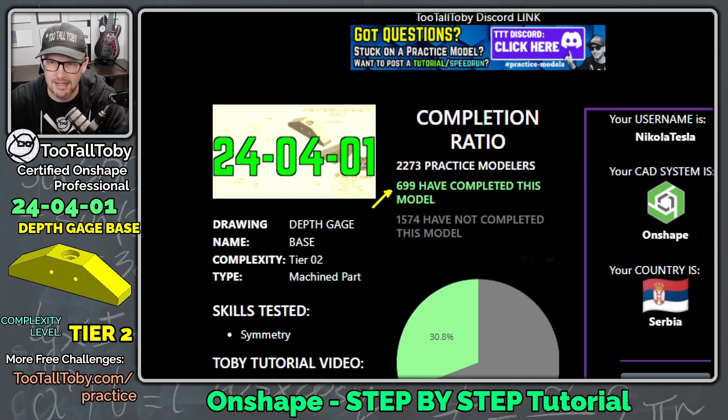Well, one of these free challenges is this one here, 24-04-01. It's a Tier 2 challenge. So let's click here to practice, and once we click here to practice, we can see that there are 699 people who have completed this model. So let's see if we can become number 700. So we're going to go down here to the very bottom. We're going to say click here to begin, and we're going to say reveal drawing and go.

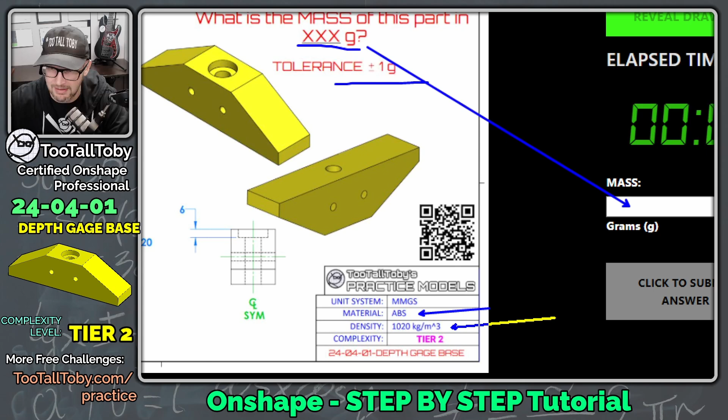What is the mass of this part in XXX grams? We're going to put that answer in down here. The tolerance is plus or minus 1 gram. And it looks like this part is using ABS with a material density of 1020 kilograms per cubic meter. So even though the clock is running, I think it's always a good idea to get started by coming up with a basic game plan and then going and starting to create your actual 3D geometry.

So for this model here, and really for any model, the first thing you want to ask yourself is, where should the origin be located in the 3D model? And so one tool that we can use to help us decide on that is, are there any directions of symmetry? Are there any lines of symmetry? So here we see it says CLSYM. That means that we've got symmetry in this model.

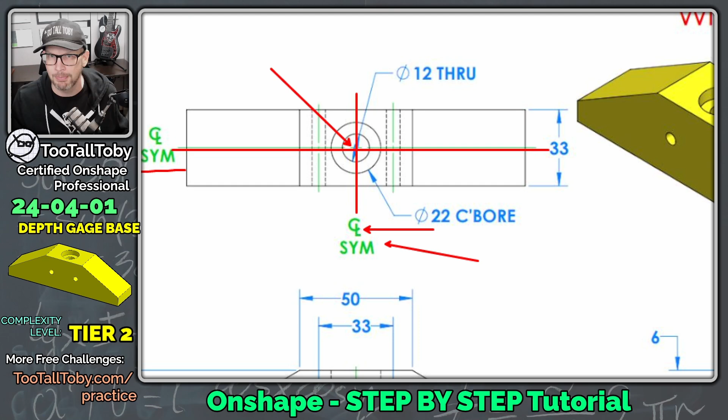So the origin is going to be located right here, right at the intersection of those two lines of symmetry. And that's going to make it easy for us to do mirroring commands or maybe add this part into an assembly and locate it using those planes. Now, as far as the origin location here in the front view, if you don't know anything else about the model, you can usually just put it right here at the base of the model, right where the model would rest upon a table or maybe on another part in the assembly. So the origin is going to be located right here, right at the center of the model.

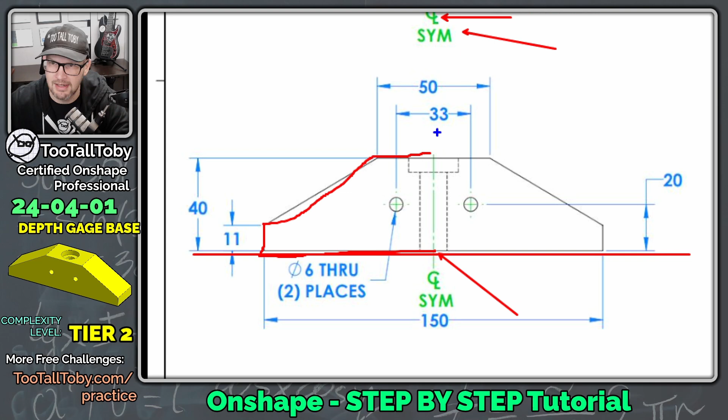Now, the next thing that comes into the game plan is, what should my first sketch look like? And I think this sketch is going to look something like this. It's going to be half of this polygon, and then maybe we'll create a center line here. We'll use the letter Q to create that center line in Onshape, and then mirror that geometry across for that first sketch.

Now, after we take that first sketch and we extrude it out to 33, for our next feature, we're going to create these holes, and we're going to do something kind of fun here. We're going to use a rectangle to define the location of those holes, and then we'll use the Onshape hole tool. And then for our final feature, we'll once again use the Onshape hole tool, but this time to locate this hole, we will use a mate connector. So even though this is a Tier 2 level complexity model, there's still a lot of really cool tips and tricks and shortcuts for Onshape users.

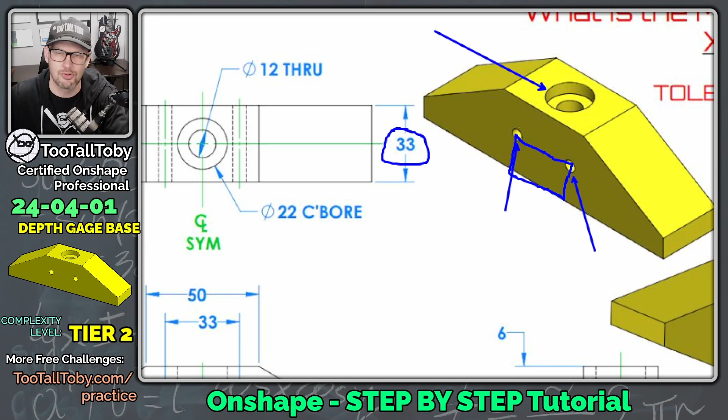Let's get into today's challenge. So I'm going to take this drawing and move it over here onto my second screen. Let me close the current drawing here. We'll close this current document.

And let's bring up our keyboard cam and the clock. We can see we're 2 minutes in, so we got to make up some time here. So let's do this. Create document, and I'm going to call this 24-04-01-depth gage base. And I'm going to create this as a public document.

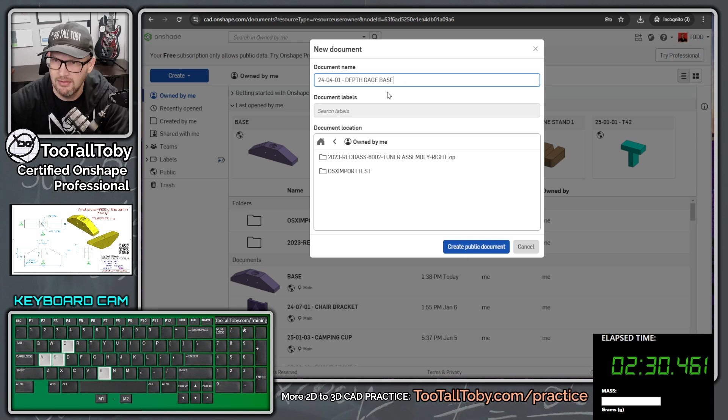So if you are ever interested in looking up this part, my actual part file in Onshape, you can just go here and search the public repository in Onshape. Anybody with a free Onshape account can do that. So I'm going to say create public document, and boom, we are in 3D CAD.

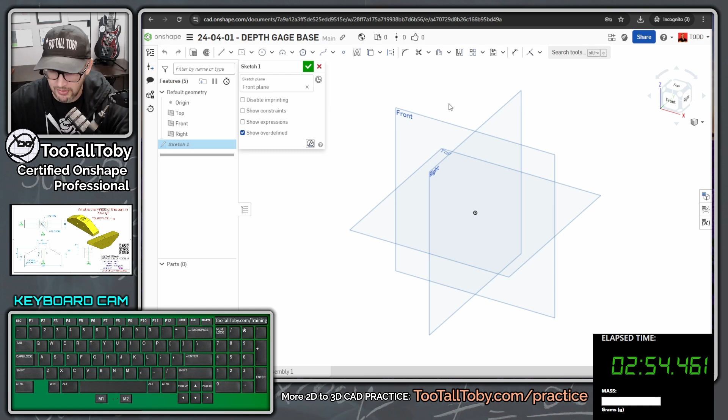Let's go to the front plane, S key, begin a new sketch. So I press the letter S on my keyboard to bring up that menu, and then N to get normal to that front plane. Now I'm going to press S again, and I'm going to launch the line command, and I'm going to bring a line over here about 75 millimeters. I'll just use that kind of dynamic feedback to get me close. So 1/2 of 150. I'll come up here about 11 millimeters.

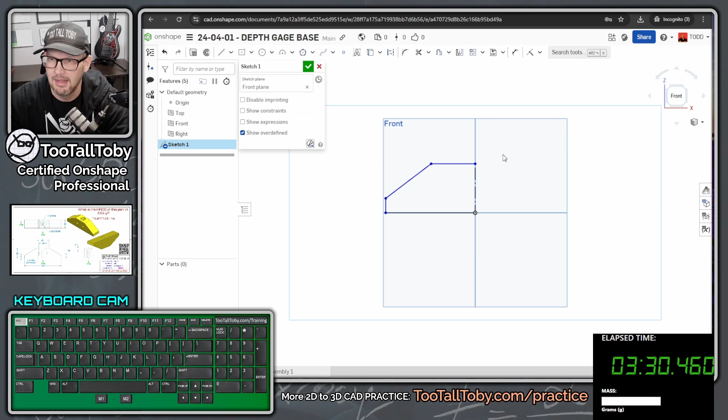I'll go up here at an angle and then come across to finish off that sketch. And then as I'm creating this final line here, I'm going to press Q on my keyboard. And you can see what Q does is it changes that line from being a solid line to being a construction line. Now, the reason that's helpful is because now I can press Escape and then I can put a window around everything, and then I can choose this icon here, mirror, and that just mirrors that whole sketch right over.

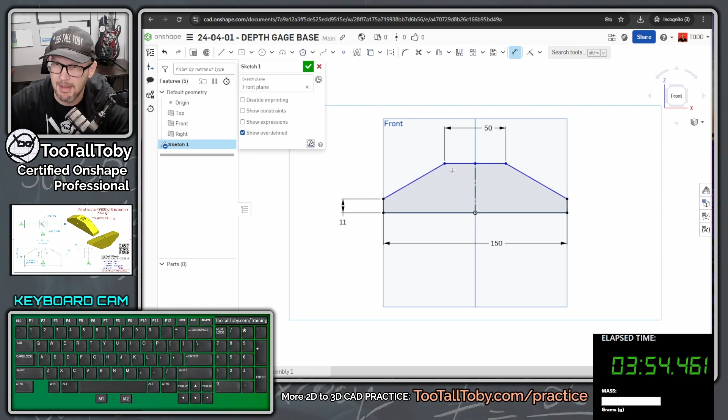So now I can just press S and go into the dimension command and create a dimension here for the max width, 150, enter, single click on this line, 11, enter, and then click on this point and click on this point, and we're gonna make that 50 millimeters. Now the final dimension is going to be our height dimension here. So from the top to the base there, and that distance is going to be 40 millimeters. And there we go. We've got a nice fully constrained sketch. That's what we always want in Onshape before we turn it into a feature.

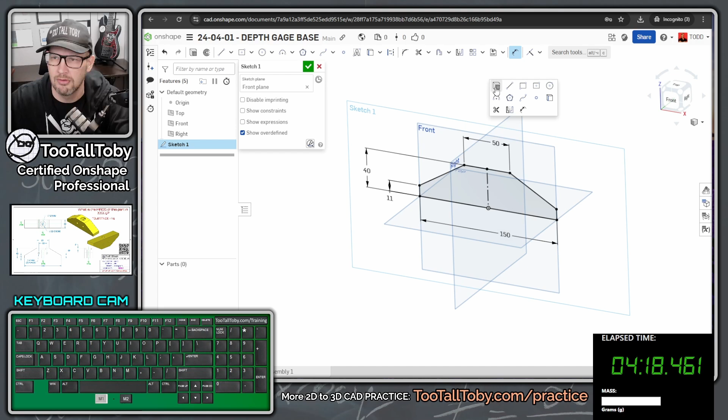So now that we've got that first sketch in place, we can press the S key. I've customized my S key here in Onshape so that I've got the extrude command right there waiting for me. So I'm going to choose extrude, and then I'm going to press the tab key on my keyboard. I think this is a really nice shortcut. You can press the tab key a couple of times and get down to the depth, 33,

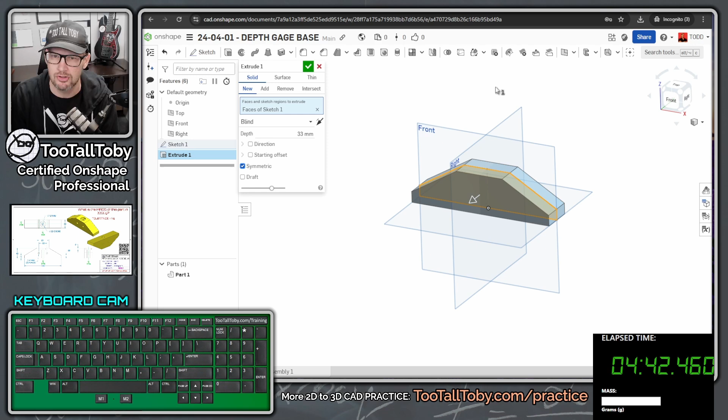and you press enter one time. And then you can press the tab key a couple more times to get down to symmetric. And then you can press the space bar on your keyboard, and that activates that symmetry option. So you see that extrude changed from going in one direction to being a mid-plane extrusion. And now we can just press enter on our keyboard, and boom, we are done with that first feature.

And so now for our second feature, what we're going to be doing is adding in these holes here that are punched through the model. Now you might say, why not just include those in the first sketch? And you could certainly do that, but a lot of times it's beneficial to kind of break up your features, especially if you need to go back later and make changes to your model. So don't ever feel like you have to put everything in one sketch.

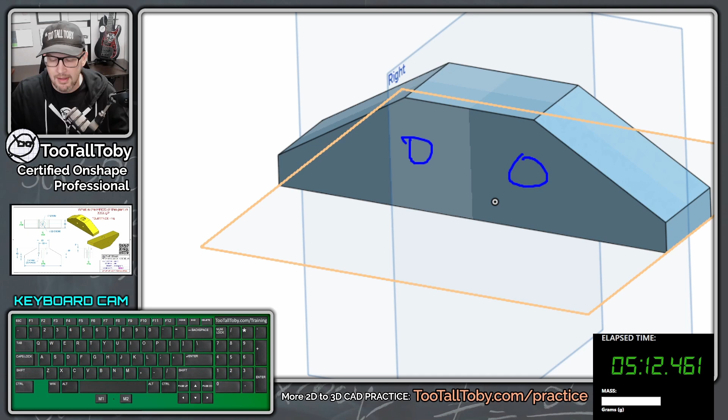A lot of times it's better to keep your sketches simple and just to have more features in the tree, especially if you get in the habit of renaming. So I could call this kind of like the main shape, and that way I can tell right away that it doesn't have the holes in it just by looking at the tree. So now I could pick on this face here, S key, begin a sketch, N key, that gets me normal. And now this is where we're going to do something kind of tricky.

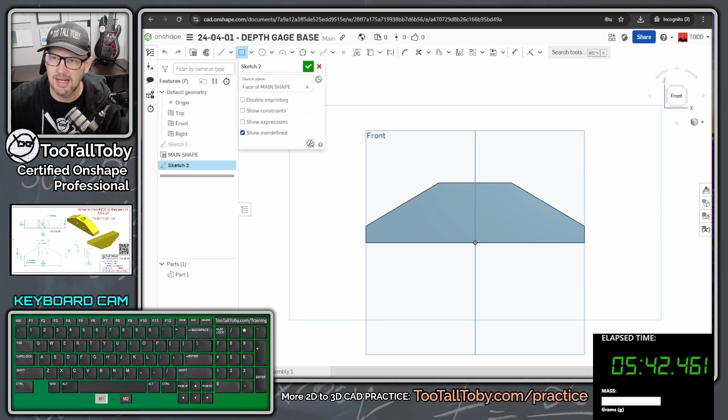I'm going to press the S key again, and I'm going to create a center rectangle. Now again, I've customized my S key, so if you don't have center rectangle, you might consider adding that to your sketch shortcut toolbar. But I'm going to choose the center rectangle command. I'm going to move my mouse here so I'm directly above the origin.

I'm going to single click. I'm going to move my mouse kind of up and to the left, and then I'm going to single click again. And now I'm going to let go of my mouse, and I'm going to type in the dimensions to locate those two holes. So the width between those, the center to center for those holes is 33, enter. And then the height from the base is 20, enter.

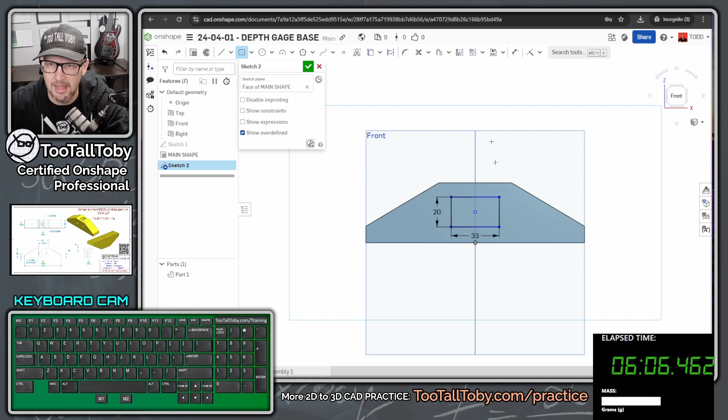And then what I can do is I can press escape to get out of the rectangle command, and I can just take this lower line, single left click, and this lower line down here, single left click, and press I to establish a coincident relationship between the bottom of that rectangle and the base. And that can be a huge time saver when you're locating things like holes. Because now what I can do is I can exit this sketch. So I hit the check mark here to exit that sketch, and then jump into the hole command in Onshape.

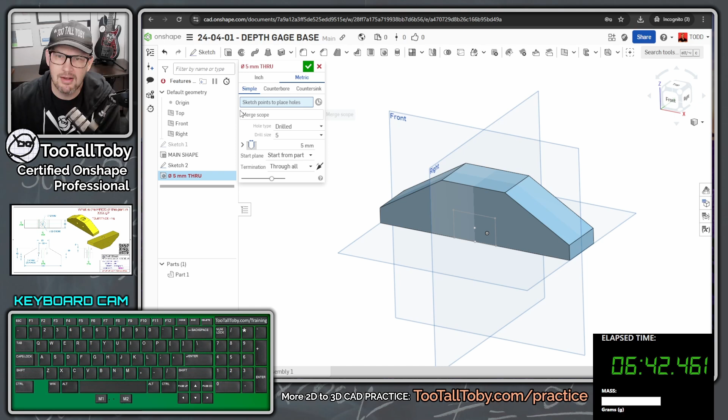And you can see you can choose either inch or metric for the standard for the hole. And then you can choose simple, counterbore, or countersink. Well, I'm going to choose simple. And then here you see it says sketch points to place the holes. Well, I can just pick on this point here and this point here from my rectangle, and we've got those holes perfectly located. And so now I can go down to the diameter of that simple hole. That diameter is going to be 6 millimeters, enter, that updates the preview.

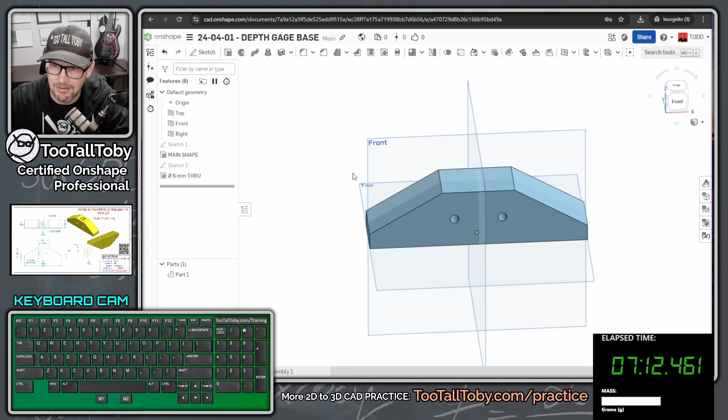And then I can go down here for the termination and make sure that that's set to through all, so those holes go right through the entire model. So now that I've got that in place, I can hit the green check mark, and there we go. We got those holes running through. Onshape even took it upon itself to automatically hide that sketch. So you can see here that that sketch is hidden.

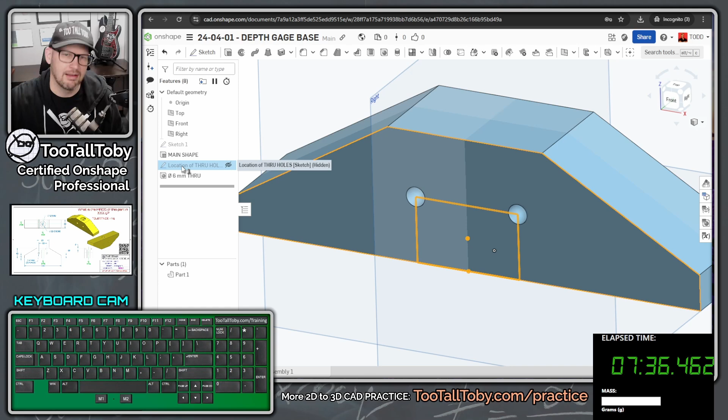So maybe I would click on that sketch and press Shift N, and then I would rename that to something like location of 6 millimeter holes. Or sometimes I don't name them based on the size. Sometimes I name them based on the location in case the size changes. So location of through holes, something like that. So now I know that that sketch is kind of like the dedicated sketch for those through holes. Now you see here I've got several things selected. So you want to remember you can press the space bar on your keyboard, and then that unselects everything.

And so now for our final feature, we're going to use what's called a mate connector.

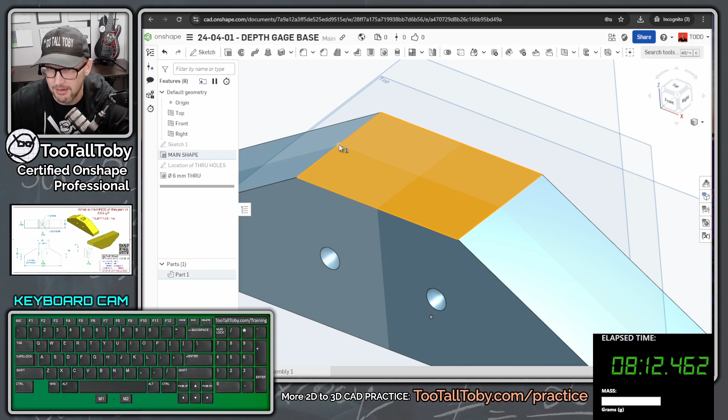But the mate connector video will really help explain what mate connectors do. But basically, if you pick a planar face, a rectangular face like this, you can use a mate connector to automatically select the midpoint of this edge, or pick this corner, or pick the midpoint of this edge, or pick the middle point of the entire face. And that's what I'm going to end up doing with the mate connector here.

So I'm going to choose the command hole. I'm going to choose the standard of metric, the hole type of counterbore. And then here, instead of choosing a sketch point, I'm going to choose this button, select mate connectors. And then what you'll see is as I take my mouse out over these different faces, I can use the mate connector to select the very center of any one of these faces. Well, I'm going to be selecting the very center of this face here.

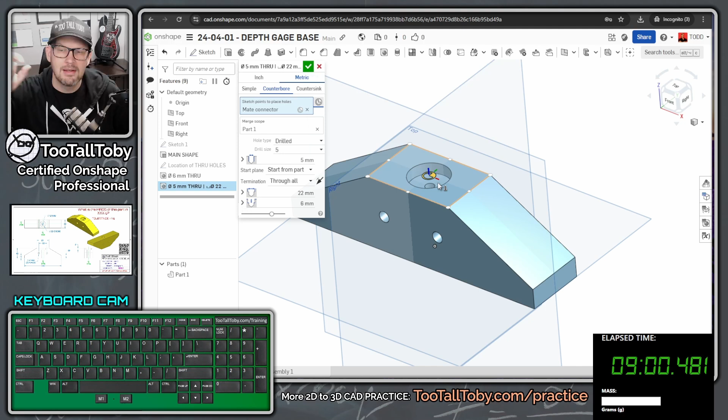So I can pick the midpoint of the edge or the end point of the edge or the midpoint of this edge or the center of the entire face. And so that's what I'm going to do here. I'm going to pick here. That selects the location for the hole to be based on the location of the mate connector, which is the center of that planar face that I selected.

And then I'm going to go down here to my counterbore definition. So the through hole for the counterbore is going to be this first dimension here. I'm going to make that 12, and then I'll use the tab key again, and I'll just tab, get down here to the diameter of the counterbore.

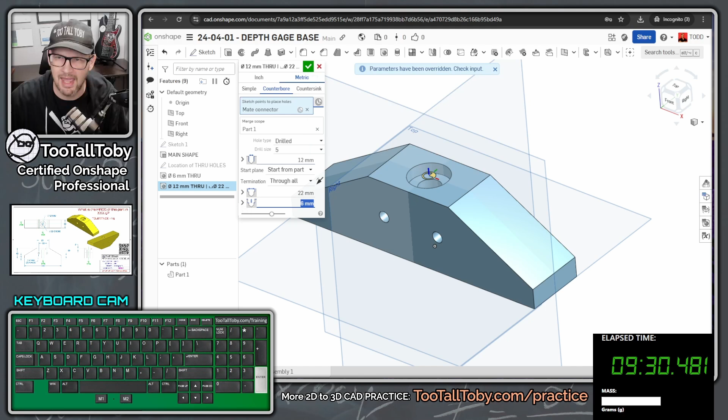That diameter is going to be 22, and then I'm going to press tab again, and this is the depth of the counter bore, and that depth is going to be 6. And then I can press enter, and there we go. This model's looking pretty good. I can press the P key on my keyboard that hides the planes. I can roll this view around so that I can see the entire model just to kind of confirm that it looks like the drawing.

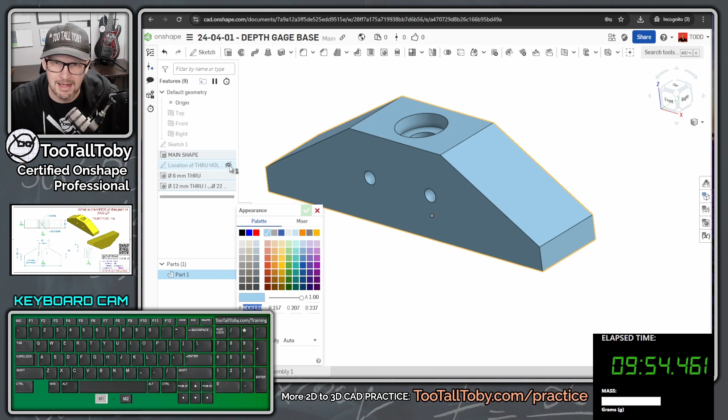Now, if you're working with customers, a lot of times the customers want to see the parts in the same colors that they originally gave you in the spec. So you could right mouse button down here on the name of the part and say edit appearance. And then you can choose to make this yellow color, or you could even go into the mixer. If you happen to know the RGB formula, you could do like a 255 tab 0. That's the formula for yellow.

If you happen to know the hex key, the FFFF00, then you can just type that in as well. Or you could just choose it here from the mixer and kind of try to get it pretty close to what the customer gave you. Either way, there you go. You can change the appearance. You probably wouldn't do that in a speed run, but if we're just doing this for the customer, it's good to know how to do that.

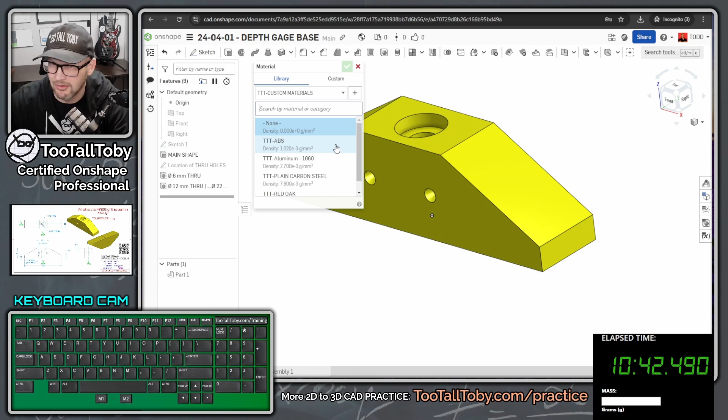And then finally, to calculate the mass correctly, we have to have the correct material properties. So we right mouse button on the name of the part again. We go here to assign material, and then we can move this box up top here, and we can say we want to change this from the Onshape material library to the tootalltoby custom materials library. Then we can fly out this menu here, and we can choose ABS. And we hit the green check mark.

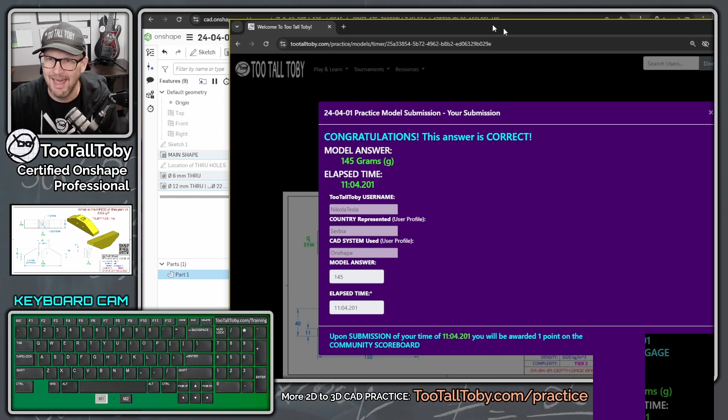And now down here, kind of behind the clock, we've got this icon, which is for mass properties. So we click on that icon in the lower right. We come up here, we click on this body, and we're coming up with a mass of 145 grams. So I'm going to come down here into this box for mass, 145 and enter. And oh yeah, there we go. We see it says, congratulations, this answer is correct. We got it correct, 145 grams. So I'm going to say submit.

And once I submit my answer, I unlock some additional analytics down at the lower part of the practice models page. So here we see that now 700, actually somebody else did it while we were doing it. So now 701 people have completed this model. And then if we scroll down here, we can see that the average time for this model is 4 minutes and 48 seconds. Wow, that's pretty fast. My time for the model was 11 minutes and 4 seconds. And then the fastest time was 1 minute and 5 seconds by Hasse.

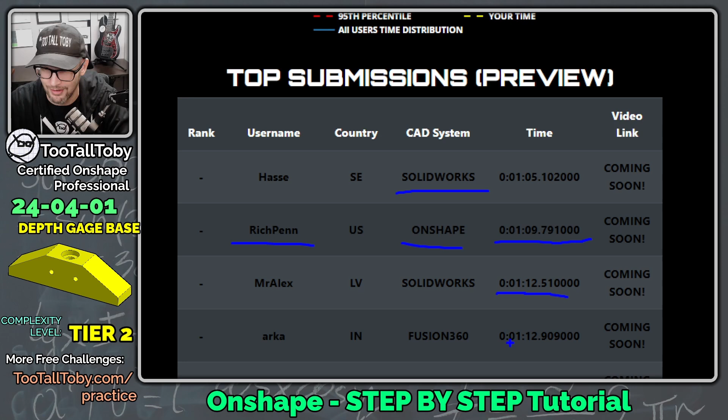And if we scroll down a little further here, we can see that it looks like that user was using SolidWorks. But look at this, Rich Penn using Onshape finished it in 1 minute and 9 seconds. So it looks like it is possible to get it done that fast using Onshape. Here's 112 using SolidWorks. Here's 112 using Fusion. So really cool stuff here to be able to kind of see the different CAD systems that are finishing this and how quickly they're finishing it.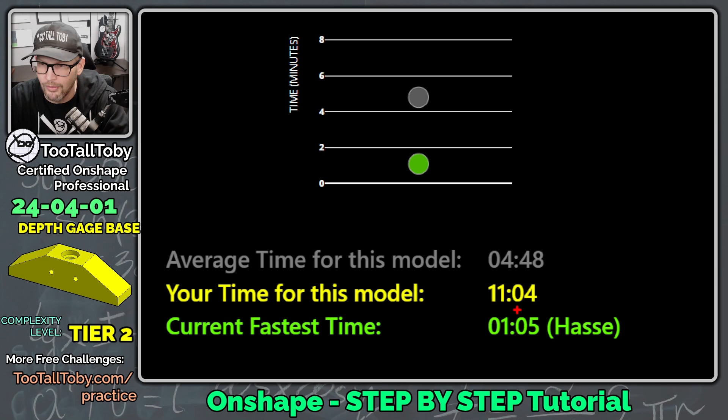And just remember, this app really is available for anybody using any CAD system. Maybe if you're trying to learn a new CAD system, you might consider pulling up the Practice Models app and practicing through some of these models. But here at this point, you can see that I finished in 11 minutes and 4 seconds. My goal is always to try to get close to or maybe even beat the average. So maybe what I'd want to do is practice my run a couple of times, and then I could come up here and choose try again and see if I could get a faster time.